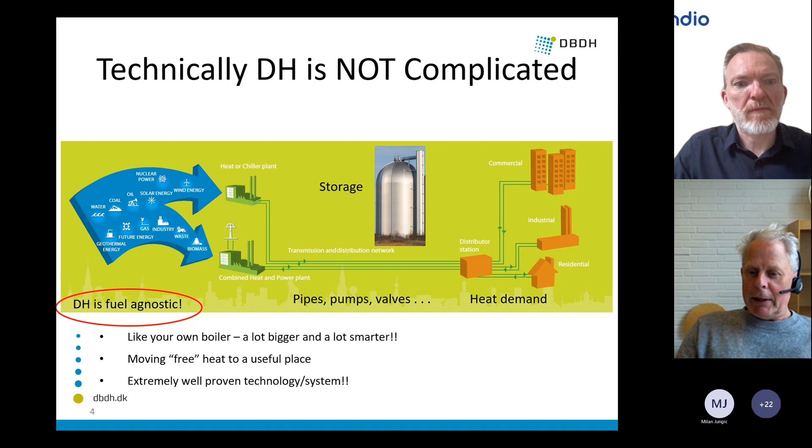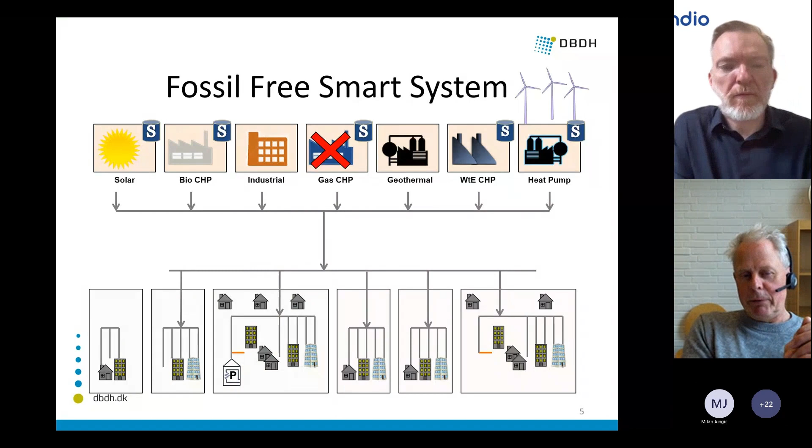It's also a part of moving us towards a fossil-free, smart energy system. The picture here shows we can add any kind of heat sources at the top, and pump it to any kind of building at the bottom. In the middle we have gas CHP - I've already crossed it out because we don't want that in the future, but there's nothing wrong in starting with gas CHP. We started with coal in Denmark. Over time, you can change it by just changing one place instead of going out to all the buildings and households at the bottom of the picture. So it's also a fossil-free smart energy system.

If we take a look at Denmark, some numbers first - these are a bit outdated, but I like them: half of the heat demand in Denmark is covered by district heating. Two-thirds of all households are covered by district heating in Denmark, and that number is definitely going up - we are looking at going towards 75% now. If you look at major cities like Copenhagen, Aarhus, all the major cities in Denmark, it is as close to 100% as you can get. Copenhagen is 98, some say 99, doesn't matter. Today we have around 400 networks organized in 350 district heating companies.

And it's interesting because they are competitive price-wise to the alternative, nearly all of them. Here you have a picture of the Copenhagen system to the right. From Køge down in the south, up north, it's about 50 kilometers. From east to west, it's 40 kilometers.

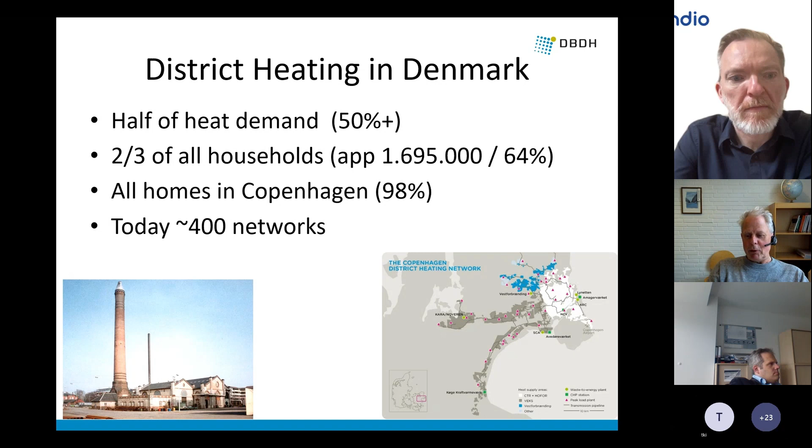It is one big integrated system. And on the left, you have the very first 1903 picture of the waste incineration in the middle of Copenhagen. It's not functioning anymore, it's just a picture. I also said that it is a part of the sustainable smart energy future.

Here we have a picture of the heat sources for district heating used in Denmark. The bottom part, including the pinkish one, is the fossil part. You will see that pink will disappear, black will disappear, almost gray will disappear over time. We simply take out the fossil fuel step by step. So the two-thirds of Danish district heating that is renewable, that number will grow and grow and grow.

By 2035, we will be very close to 100% renewable. What do we put in instead? We put in heat pumps, that's the blue one at the top. We will add a lot of electricity to our system, mainly through heat pumps, and then a little bit of geothermal and other things. And you will notice that biomass is there.

There are two important messages in this picture. One is we go sustainable, that's what you see directly. The other one is the top bar, this one up here. It shows that demand for district heating, we expect that to increase over time slightly. It's not a dramatic increase, but what is more important is it will not go down.

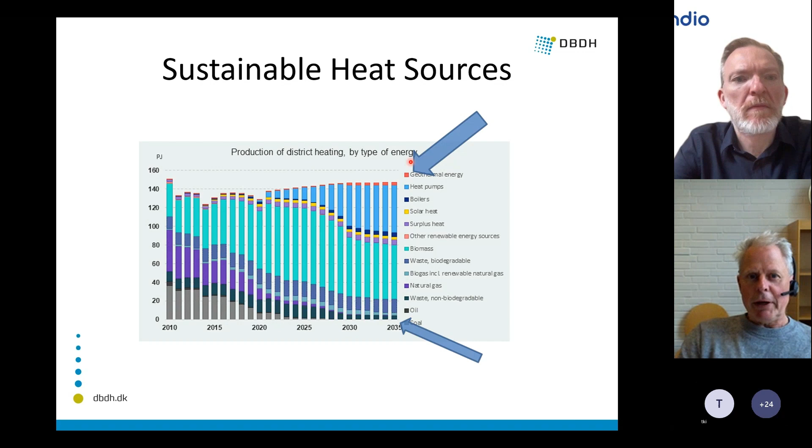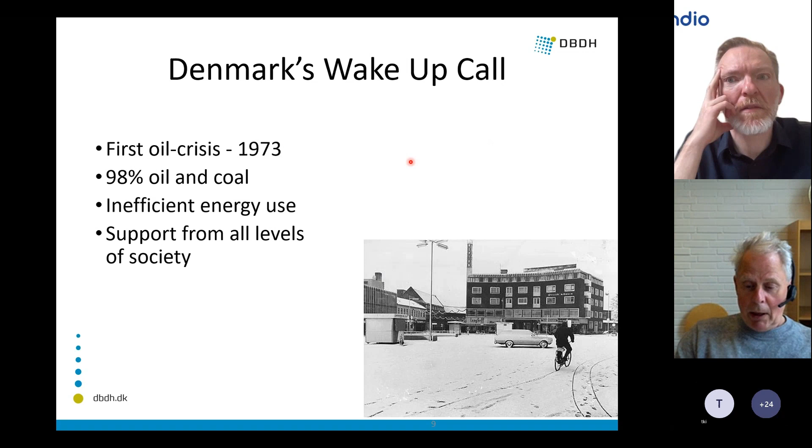How did it happen? In '73, we had a wake-up call: the first oil crisis. Then in '79, the second oil crisis. And then, trust me, things started to happen in Denmark because we were 98% dependent on imported oil and coal, and we had very energy inefficient use of our energy. And then we need to do something.

What did we do? We threw in a lot of legislation, we threw in a lot of incentives to support a development where we got rid of the import dependency, and then we had a very clear business model. I will not talk about all the legislation and incentives because that is back in time and extremely Denmark specific, but the business model, I'll come back to that in a second.

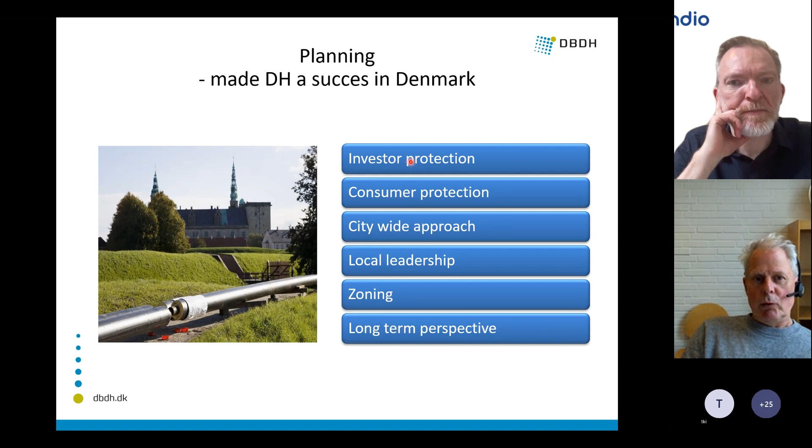That drove us there. I will say there was also one other thing: planning. We made sure through our planning that we provided investor protection, we provided consumer protection, we made it citywide. We do not talk about small islands, we made citywide approaches. We ensured local leadership, we had the zoning, and we definitely had a long-term perspective. That is what good planning does, and it makes it easier to do district heating. That is also a part of it.

Okay, in the 70s, energy crisis. What do we have today? Now we doubled it up, we have two crises. We have a climate crisis. We don't talk as much about it these months, but we have an energy crisis. So the next slide, you think I've just repeated the three previous slides, but I didn't. Well, I did, but actually this is a new wake-up call.

We need consistent energy policy. We need long-term planning, and we need planning to make district heating a success. That goes for Denmark, it goes for everywhere.

And what are the developments we see in the district heating world today? Besides the need for municipalities and states to do something, to put in framework conditions, there are a lot of things going on: power to X and hydrogen. We don't heat homes with hydrogen, that would be a bad idea. I'm not saying stupid, I'm just saying bad idea. But we need hydrogen because it gives us a lot of heat.

We will see a lot of electrification, we will see a lot of digitalization. Storage will become increasingly important because then we can decouple the time of production from the time of consumption, and we can let other factors decide when we will produce heat.

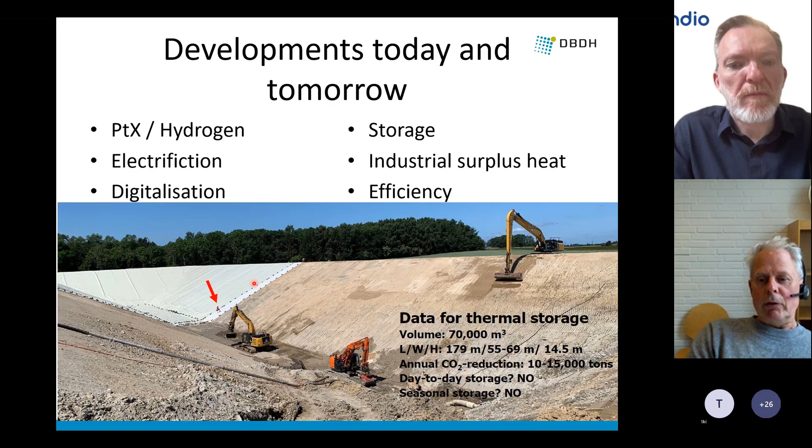This is, by the way, a storage, only 70,000 cubic meters. It's not very big, but you will notice down here there's a man, which gives you a little bit of an example of how large this storage is. We will see an opportunity to get a lot of industrial surplus heat collected. And then I think in general, we will talk a lot about efficiency, both in buildings, in the network, in the heat production, in the storage production. So it's still an industry that is going on.

So my last comment is gas and oil is obsolete, and district heating is the only solution in cities. We can discuss that at the final webinar when you've been looking at all the training courses. I'm just saying that's the way it is. Let's face it and let's work on that.

I have, I guess, one more minute. If we look at a Danish district heating company, what is special is it has a democratic ownership. It's owned by the end users. That is a way to give the owners, the end users, the customers, power over the company, because they can't go and buy heat anywhere else. So we have given them that kind of ownership power. It's also not for profit.

That is debated heavily during the training courses, so have a look there. We will also see that a Danish district heating company is in charge of the whole value chain. In charge of is not the same as having ownership of everything, but they manage and control it somehow. And in general, especially the companies I work with, are professional commercial acting organizations.

When you get into the program Torben offers here, you will meet Jesper. I think you will all find that he is a professional and commercial acting managing director of a district heating company. And with that, I'll just say thank you, and you're always welcome to contact me.

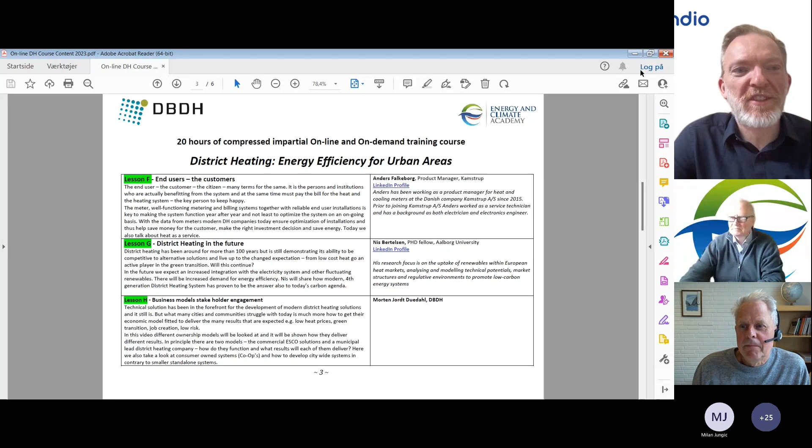Okay Mikkel, I think that's all from me. Thank you. Muchas gracias, Torben. Nada. Very, very interesting, and it's a very comprehensive program, definitely.

Now it's my turn, and I would just like to give you all a small tour of the shop and learning platform.

You should be able to see it here. So basically, what you will see in a minute is first the shop, found on shop.aprendio.io, where you can go and find the Energy and Climate Academy as one of our training providers. Here are the different courses that Torben and his academy are providing.

If we select the district heating course, you can see here the description of the course. We have more about the various modules and the learning objectives, the target group, and later information about the lectures. There's a long list of very insightful people from the business.

And here you have an overview of the various modules, and you're actually also able to purchase access to one specific module, or a number of modules if they are of interest, or you can buy the full package. So when you purchase a module, you put it in your cart.

If you are a company in the EU, you have the opportunity to put in your VAT ID and get the VAT deduction at checkout. And then after signing in, you have the opportunity to pay with various sources: credit card, PayPal, invoice, etc.

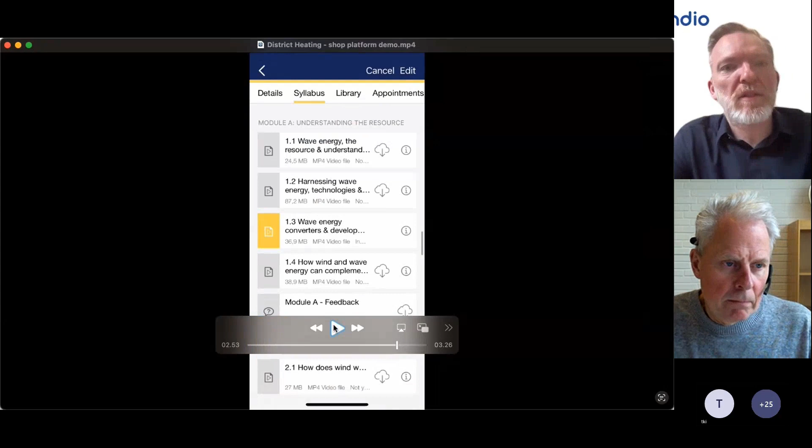So when you have paid, what we will provide you with is access to the course itself. That comes on the... let's see the learning platform, one second here. Sorry, I just have an error in the video, so if you'll excuse me for one second, I'll go directly into the learning platform instead.

Now you get the online experience instead of here. So here we are in the learning platform. So when you enroll, you have access to a number of courses.

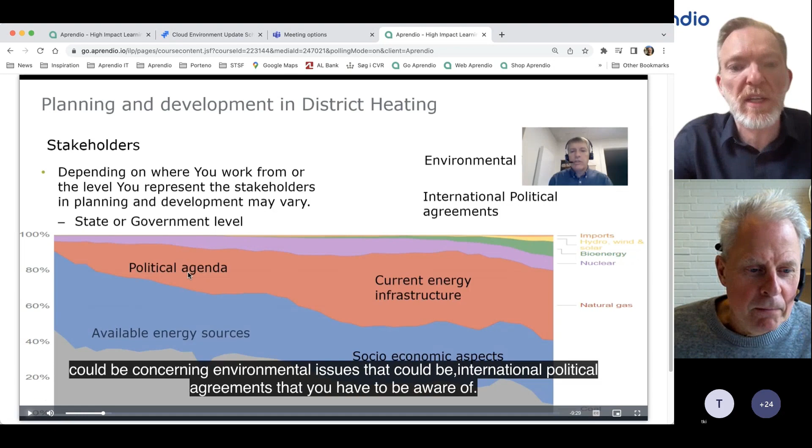For example, I can take this module here, and then I will be able to get access to the specific module that Jacob has been preparing. I will then have the opportunity to run this module and see the topics that he's discussing, and it's at a very, very high level. I've really been personally positively surprised to see the level of the content available in the platform.

In addition to having access on the learning platform, we also provide a mobile app, and on the mobile app you have the same material available. You can even download it to your mobile app offline if you have plane travel, and you can then consume the content and see the various videos as you go.

In addition to this, we also provide a way of interacting with the lecturers. We have an online Q&A forum where you can ask questions to the lecturers about specific topics addressed, or you can ask them at the closing webinar that takes place at the end of the course.

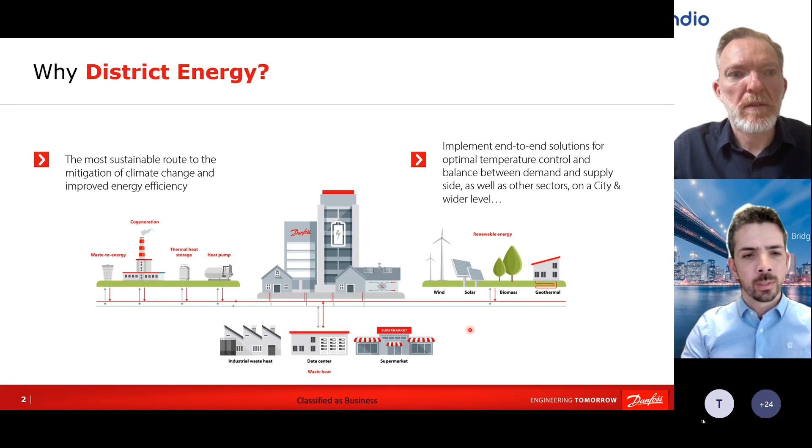Lower temperature networks are much more flexible to use more of the waste heat potential available in urban areas, like waste heat from supermarkets, waste heat from industry, utilizing geothermal energy, utilizing renewable sources, or indirect renewable energy like electricity produced by wind, which is then converted into heat by heat pumps.

I've been working in district energy for the last 19 years, and in the last 5 to 7 years district energy is finally getting the attention it deserves across the EU, being recognized as one of the pillars to decarbonize heating and cooling in Europe. But the challenge is that heating our buildings today is responsible for more than 30% of the EU's final energy consumption, and still more than 70% of that is fossil fuel-based.

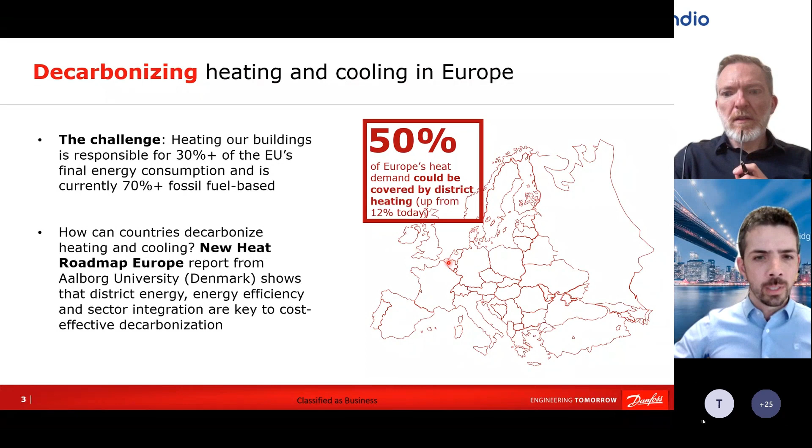In 2020, Aalborg University in Denmark revised the heat roadmap, creating a new Heat Roadmap Europe report. This report clearly shows that district energy combined with energy efficiency—lowering energy demand in buildings, but also bringing that demand from individual heating sources to district energy—and then combining all of the energy sector through sector integration, is the key to achieve cost-effective decarbonization. By this study, by 2050 we should be able to cover 50% of heating demand with district heating.

To realize this 50% district heating potential, by 2050 we need to build 21,500 new district heating systems—I want you to remember this number. An important factor is that the majority of these new systems will actually be built around 2030 up to 2035; 16,500 of these new systems will be built in that window.

Of course, to achieve this we need the right policy framework; conditions need to be met, and the EU is doing a lot on that topic. It can still be done more, but more importantly, if you're listening to these lectures you're likely considering whether district energy should be part of your professional future. The answer here is yes.

District energy is a growing sector. We will need smart people, we will need much more hands-on work to achieve the decarbonization in Europe that we are aspiring for. But going back to that number, 21,500—this study was done in 2020, and then this happened.

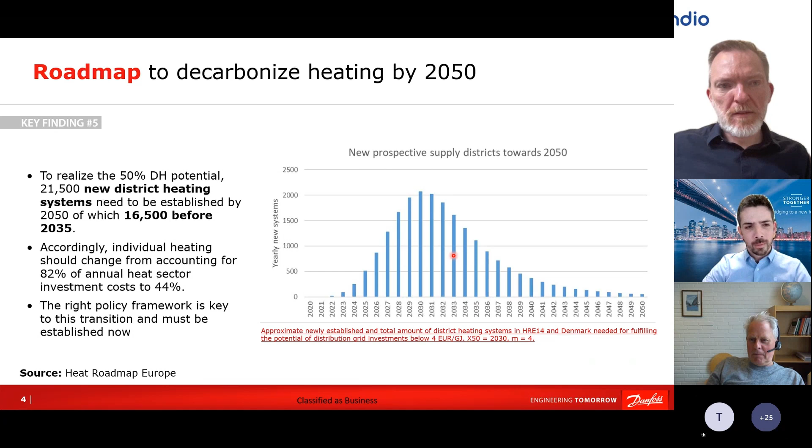We saw the crisis with the Russia-Ukraine war, Russia invading Ukraine, and as a consequence Europe is suffering a gas crisis. So today, converting individual heating systems to district heating has become even more interesting than in 2020 when this study told us we need 21,500 new systems, with the majority built between now and 2035. It will definitely move even faster.

One example the whole of Europe can look up to is Denmark, as was already clear from Morten's presentation. Denmark is the leading country here—today district energy in Denmark covers 65% of heating and cooling requirements. After the political war crisis in Europe, the Danish government now plans to transfer 30 to 50% of the remaining part not yet heated by district heating to district energy by 2028, meaning probably more than 80% of Danish heat demand will be covered by district heating before 2030.

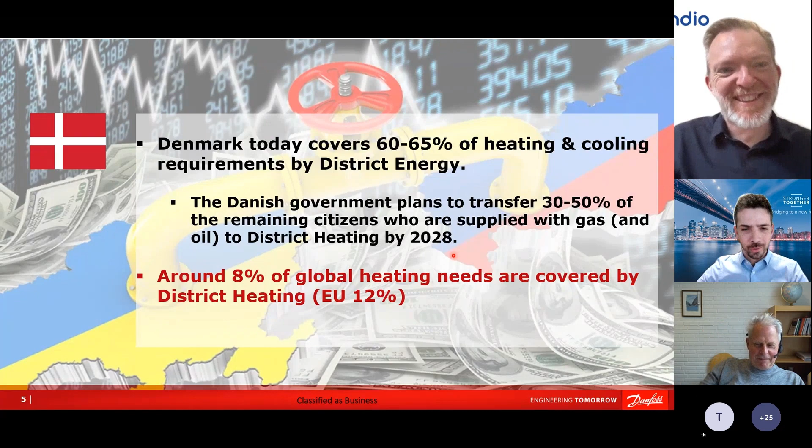We need smart people. There is a huge potential for growth, business growth, personal growth, of course. So please consider district energy to be part of your future, because we basically need you.

Many people, when they think about district energy, think it's just pipes, boilers, and valves. It's not true. Basically, digital modern technology is entering district energy. Here are three more slides where I want to show you what we are developing in that sense at Danfoss, and we are by far not the only one. If you look around at all the companies working in district energy, they are developing intelligent solutions today. So district energy is not anymore a home just for mechanical engineers, but also for electrical engineers, mechatronical engineers, software engineers, for all the modern technology that is available today.

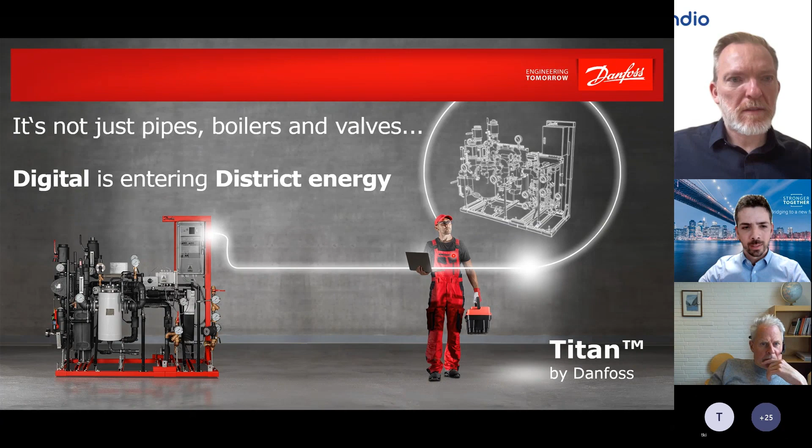One of the biggest challenges in district energy is differential temperature, that's the difference between the supply and return temperature in the pipes. Everybody who works in district energy knows this challenge is coming from the building. So district energy operators have very little influence to manage this issue, because it basically depends on how well or efficient the secondary side, the building side heating system, is performing.

But this issue is causing challenges on the networks and on the boilers. It's increasing heat losses in the network. Because of poor delta T, we need higher flow rates, not because of optimization. And poor delta T limits us in using waste heat.

On the source side, poor delta T is lowering efficiency of gas condenser boilers, and when we are using heat pumps, it's also lowering COP. So optimizing this point increases all of these benefits.

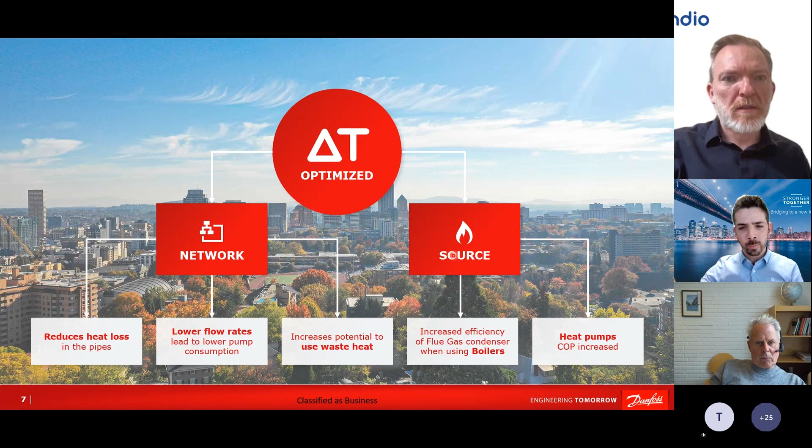As I mentioned, the problem is coming from the secondary side, from improperly balanced and commissioned secondary side systems. This is why at Danfoss we are developing a project we call Danfoss Titan. It's a digital twin of a substation.

It's actually a solution that automatically runs in the cloud, and it's automatically based on the data it gets from the field, on the measurements, and on the asset data from the substation heat transfer unit. It's automatically and continuously optimizing the PI or control parameters of the substation.

If you look at classical substations, typically when we do commissioning for the first time, the installer needs to open these valves, fill in the secondary side, start pumps. He needs to open the control valve, set the differential pressure controller. This is all done manually. Then, based on his experience, he's setting the PI parameters, neutral zone in the electronic controllers, and running time of the motorized control valves.

When we look at the data we have in our monitoring system, it's quite clear that this is an issue, because installers are not doing the majority of these tasks. Most of these substation controllers are simply left to run on default settings, which are good enough, but of course far from being optimal.

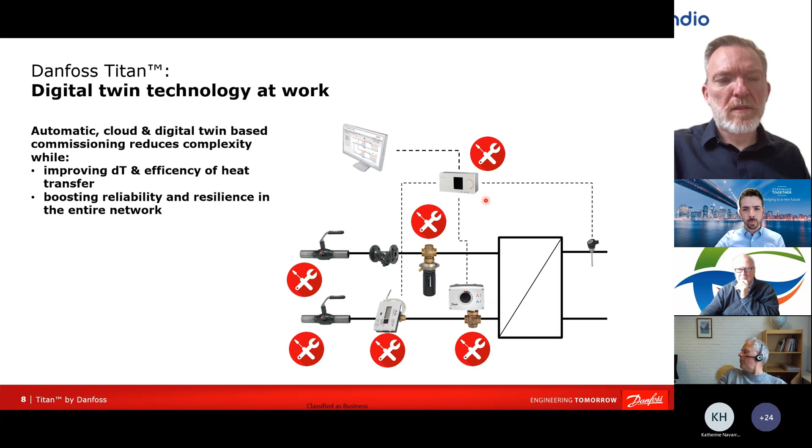Here, basically, digital twin technology, intelligent technology, can help us, because by executing an algorithm, by measuring the data in the substation continuously, and by also using the asset data from all the components, from the differential pressure actuator, flow control actuator, heat meter, we are able to use this intelligent technology to continuously optimize the running parameters of the substation. This improves differential temperature, improves efficiency of heat transfer, and all in all improves reliability and resilience of the entire network.

And this is just a start, because when you have a digital twin, you compare it with the real system, and you can see when the performance of the real system starts to shift away from how it should perform, as shown by the digital twin. You know something is wrong. This is actually where the magic starts to happen, because then we are starting to talk about predictive maintenance, starting to foresee issues just by some signs that are beginning to appear in the system.

So the future is bright for district energy.

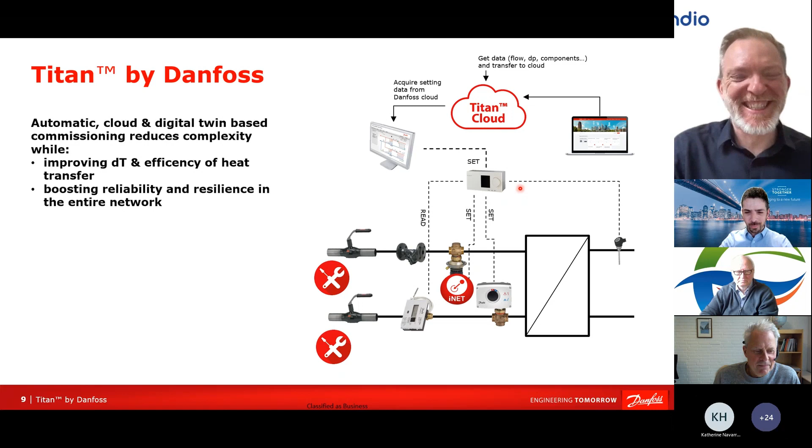Sounds very interesting, Milan. Exactly, and this is actually my last slide. So I know, Mikkel, this was a call to finish, but I think it's a good cliffhanger for people to really go in and hear what you have on your heart in the course. Super, so thank you for the attention, and I'm giving the word back to you, Mikkel.

Thank you so much, and super interesting, really giving us a new angle also to what's actually the potential of district heating, district energy, unlocking this with digital technologies.